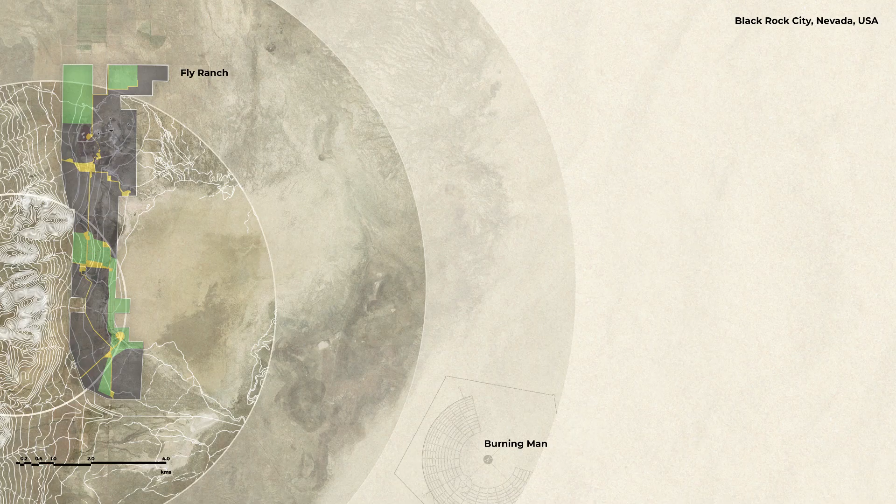The property has 640 acres of wetlands, dozens of natural spring water pools ranging in temperature from hot to cold, grasslands, and a small area of playa that opens onto the Hualapai Flat. The land's most prominent feature is the stunning Fly Geyser, a unique and iconic geothermal geyser that constantly releases water reaching 5 feet in the air and deposits minerals around it.

The Fly Ranch property is truly an oasis in the desert, and that is essentially the site. But how does it position itself around the Burning Man event?

At Burning Man, the community explores various forms of artistic self expression created to be enjoyed by all participants. Examples of creativity include experimental and interactive sculptures, buildings, performances, and art cars, among other media. These contributions are inspired by a theme chosen annually by the organizers.

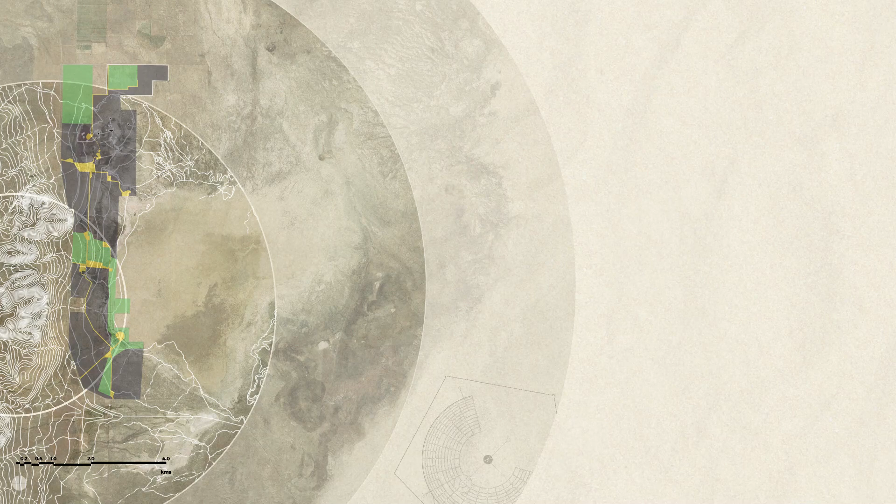As Burning Man embarks on a 2030 plan to make the annual event at Black Rock City sustainable, the Fly Ranch acquisition is a crucial step by the organizers to reinforce this effort, given the delicate yet beautiful ecosystem it contains. The competition is set to bring ideas to tackle the hard problem of net zero sustainable infrastructure with circular design thinking. These solutions can be based around systems of energy, water, food, shelter, and zero waste.

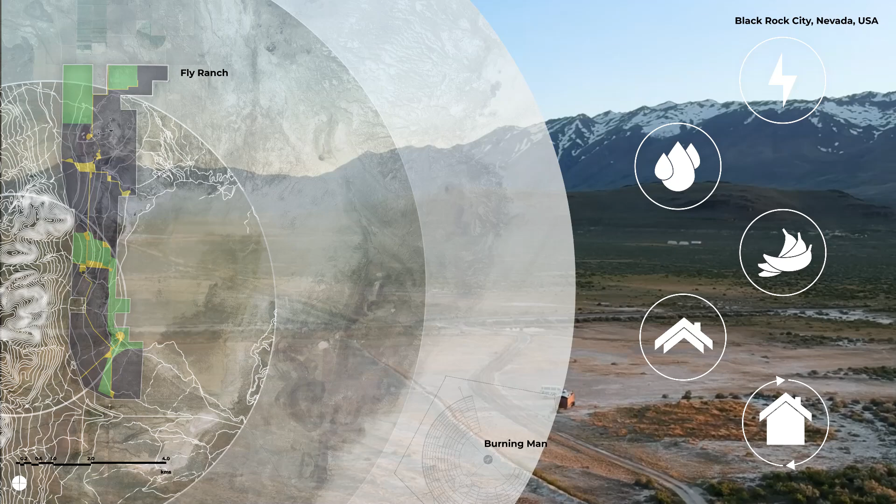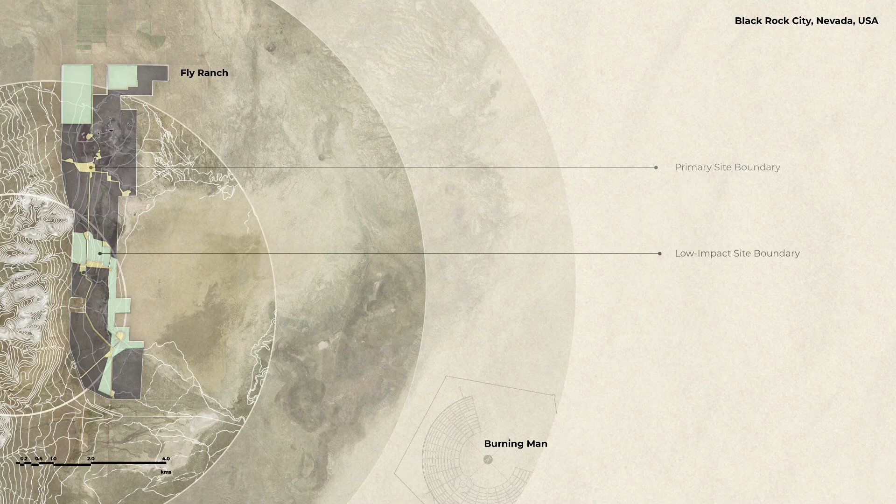The three distinct area types that define the site boundaries are the primary site boundary, where most of the design focus should be directed; the low impact site boundary, where a light footprint of proposals is allowed without deep foundations or excavations; and the conservation area, where no construction is allowed, dedicated to supporting the habitat of local flora and fauna.

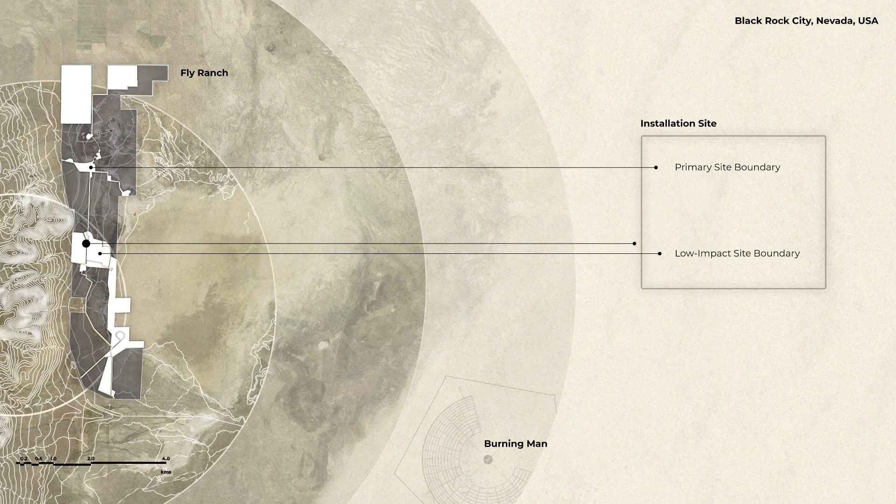The installation site is a combination of two boundaries, the primary and low impact. The reason for the central location of the site was the possibility of making the sculpture a beacon for visitors traveling across the massive property, like a lighthouse for navigation.

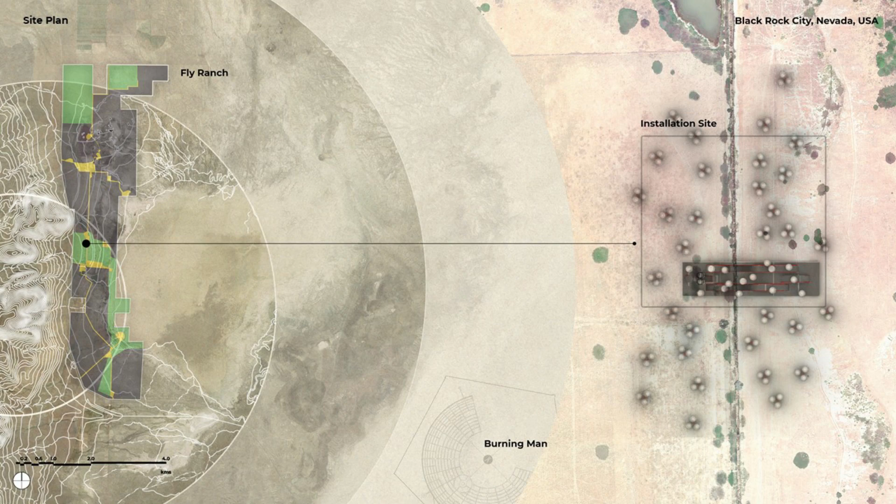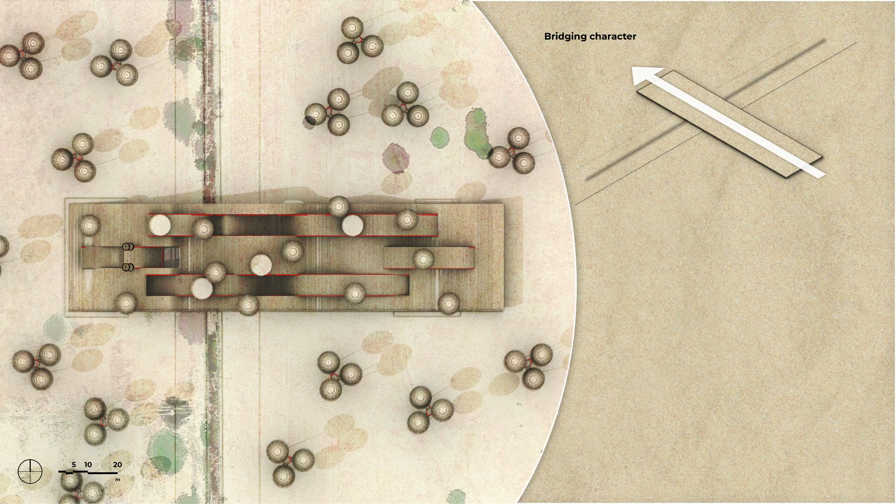The wayfinder idea is aided by a peculiar condition on site, a narrow stream of water that dissects the selected site almost in the middle and extends from north to south, thereby imparting some orientation. Though narrow, it certainly helps direct the design to have a bridging character.

This move also helps emphasize the importance of water as a transformative natural feature of the landscape. These subtle streams of lifelines are crucial to the delicate biodiversity of the Fly Ranch area and essential to conserve.

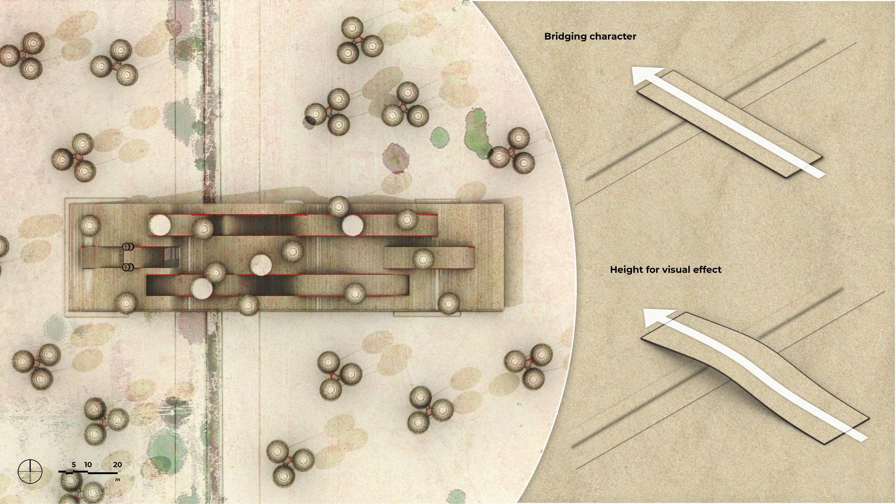As we sketch the form, we realize the potential of this sculpture to provide a sense of awareness to the fragile environment, especially if viewed from a certain height.

The design of the bridge-like platform takes inspiration from the movement of water. The ponds of water in and around the Fly Ranch area are strong visual clues as to how water can influence the ecosystem. We investigated this nature of movement of water, characterized by a sine wave oscillation.

In water's natural movement, the sine waves enlarge as they approach the shores or banks of a water body. Similarly, the platform becomes dramatic as one steps over it from either side, as if these were the very edge of water and land. The experience of the surface becomes smoother and continuous as one approaches the center, just as the experience in deep waters.

As part of a contributing infrastructure in the bare site, we wanted to establish a form that could not only draw attention for its aesthetic reasons, but also provide comfort for its users. The sine wave itself generates voids that could work extremely well for shelter, providing much needed shade for activities and leisure. Given the arid conditions of the site, it can prove to be a savior in disguise.

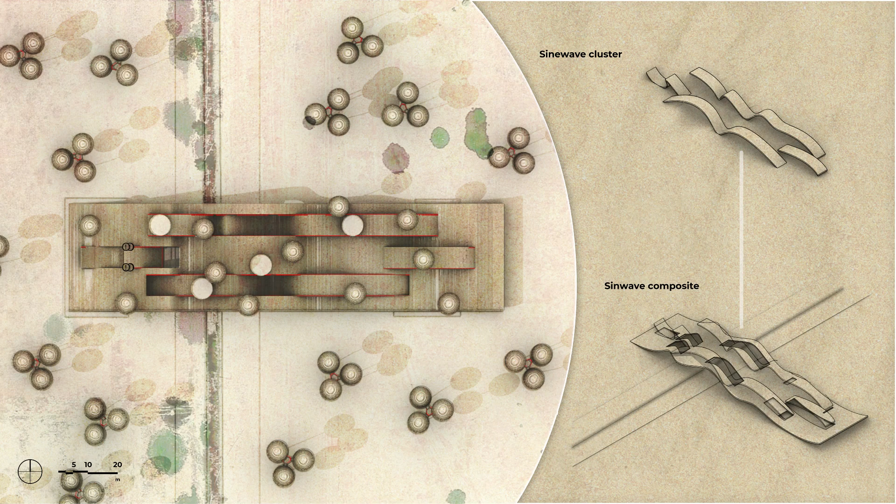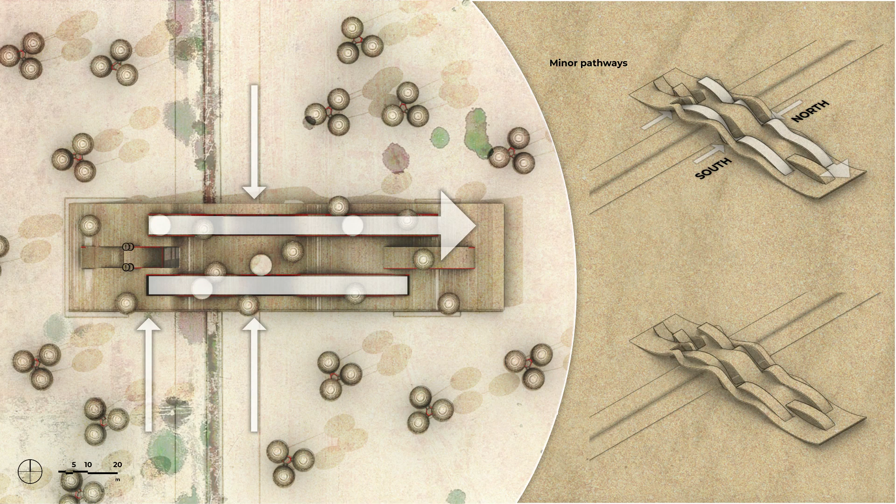The east-west orientation of the platform also aids the shading potential of the bridge-like sculpture. There is an attempt to make the access under and over the sculpture playful. The north approach gives a relatively narrow entry on the surface, while the south axis helps visitors go across the stream without disturbing it. The west side allows for a grand entrance onto the surface.

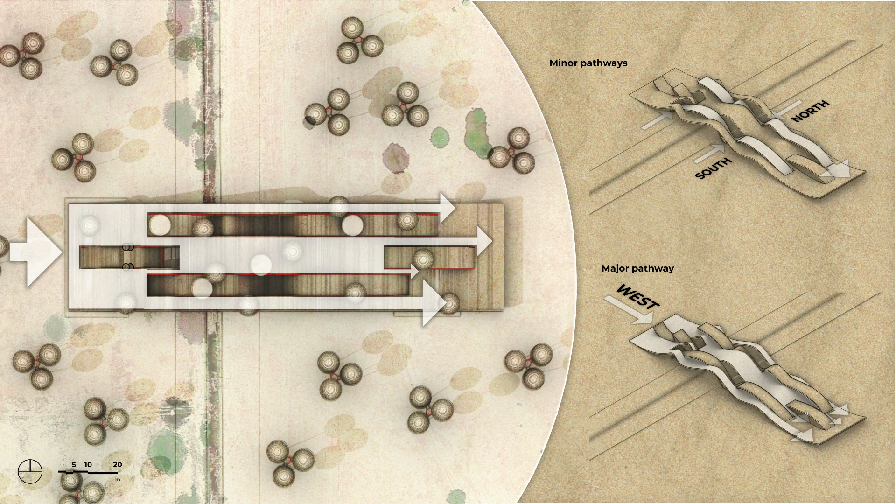One reason to keep a biased axis between the east and west sides of the sculpture is to keep activities under the eastern part less disturbed by the movement of people on the sculpture. Materiality is important to define the character of the curves. All the tectonics of the design were envisioned to be slender and sleek.

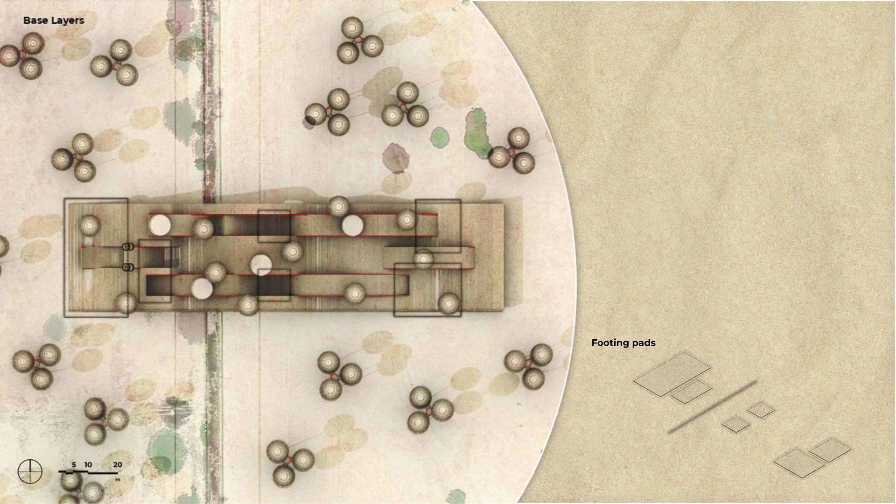The properties of the material should also aid in the easy assemblage of the sculpture on site. Starting with the base, the pads essentially lie in the low impact site boundaries. We have designed it to be flat and wide. These contact points on the surface avoid the need for deep foundations given the scale of the project.

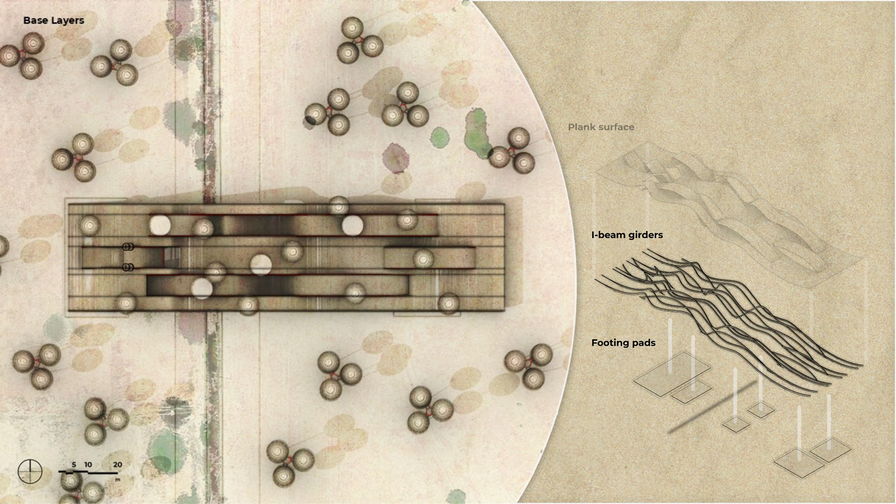The I-beam girders enable the curves to be drawn in the desired way. These also help in providing recesses which are used for electrical conduiting and lighting. Thick wooden planks are used to bridge the I-beam girders. The textural quality, workability, and thermal qualities of wood work well with the arid conditions of the Fly Ranch.

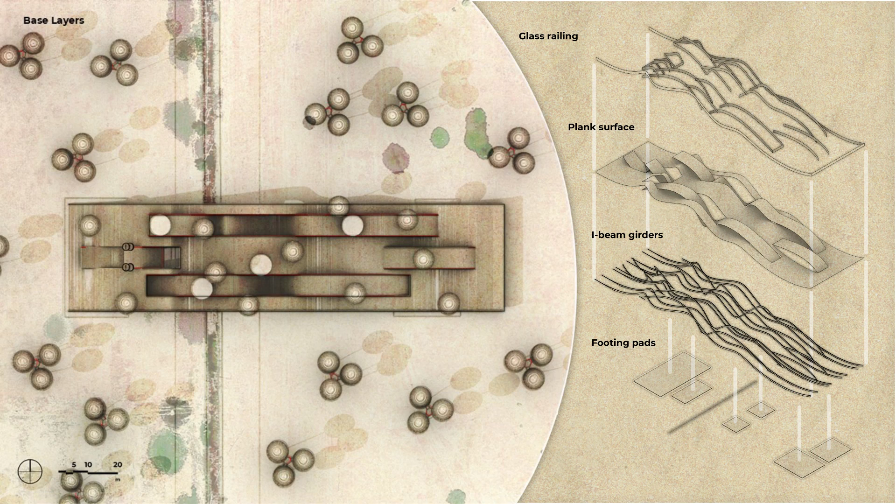These are spaced to accommodate thinner plank profiles which jut out from the surface to assist the moving up and down from the slopes. Besides safety, we intended the railings to be delicate in their aesthetics. Hence, we opted for tempered glass railing, which also incorporates photovoltaic membrane to support energy generation on site. The translucent nature of the railings, therefore, does not interfere with a minimal approach to the design.

Early in the project, we wanted to take inspiration from the ways lifeforms adapt in the fly ranch region and thrive in the scarcity and abundance of resources available to them. The buckwheat plant was an intriguing find in terms of harnessing energy and contributing to its environment as a host plant. The long, peculiar sprouting flower on top became the inspiration for the solar pods, which extend high up to tap the abundant sunlight to generate electricity, while the base becomes a shelter for the users of the installation.

The tech-savvy attendees of such events generally carry equipment such as cameras, drones, mobile phones, laptops, tablets, and all other related equipment that enable them to capture the beautiful surroundings and the eventful life that thrives in Burning Man. To support these needs, the sculpture relies on energy generated by solar means.

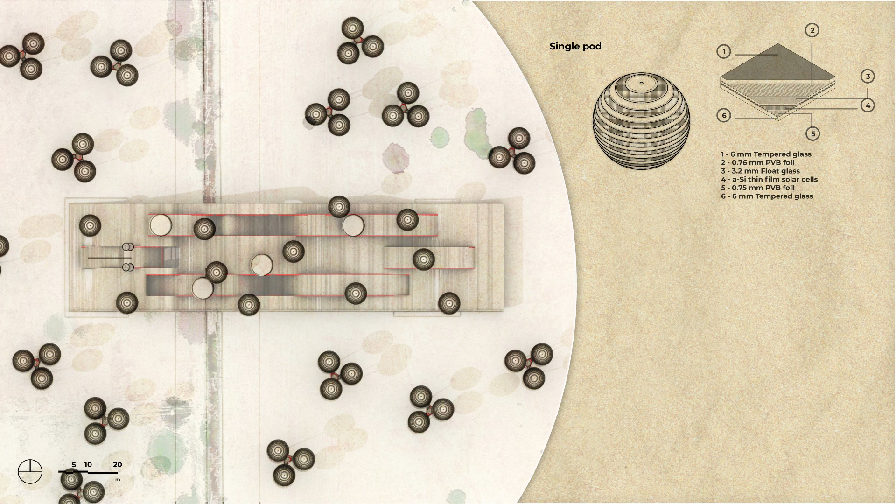The pods mimic the spherical shape of the buckwheat flower. The simple reason for the design decision is based on capturing maximum sunlight in all directions possible. The circular discs can harness sun energy even from low incidence sun rays, given the spacing which allows for light to pass through the consecutive discs.

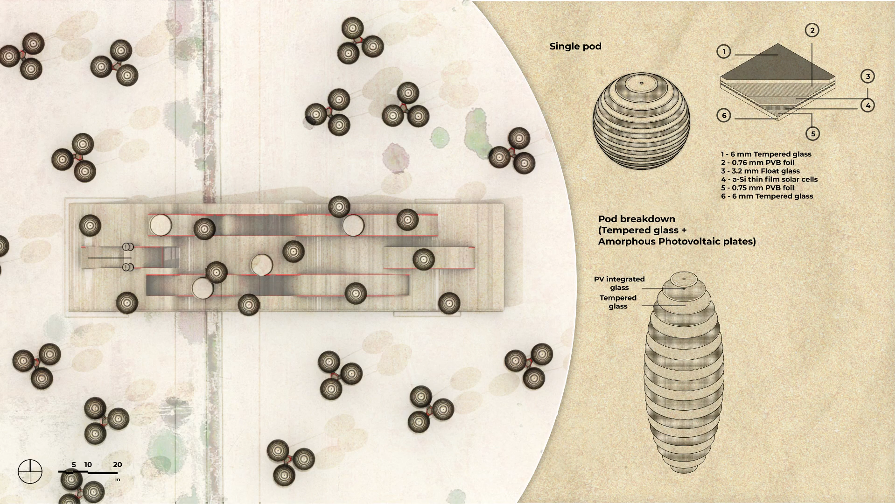These circular discs alternate between tempered glass and PV integrated glass. The PV integrated glass has a thin layer of amorphous photovoltaic membrane that generates electricity from the incident solar rays. These membranes vary in transparency and become opaque as we reach the bottommost section of the pod.

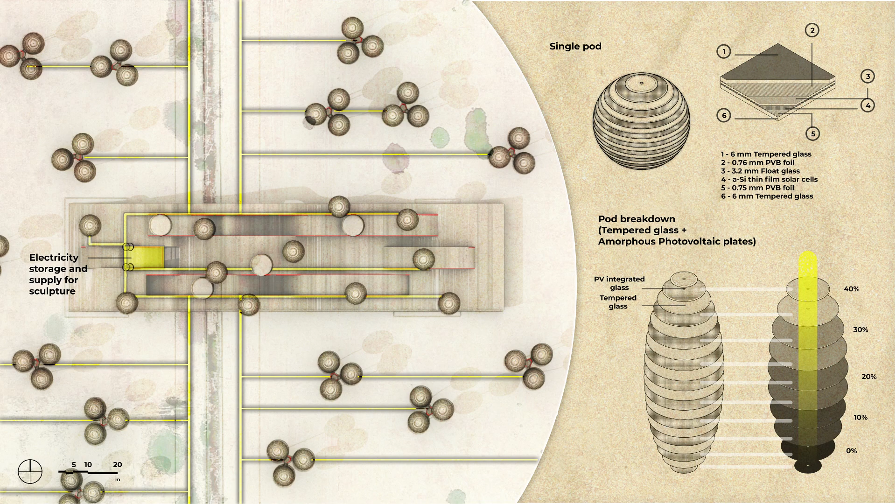The west side of the sculpture encloses a storage facility under its waveform, which is also supplied with electricity through the various pods spread across the site.

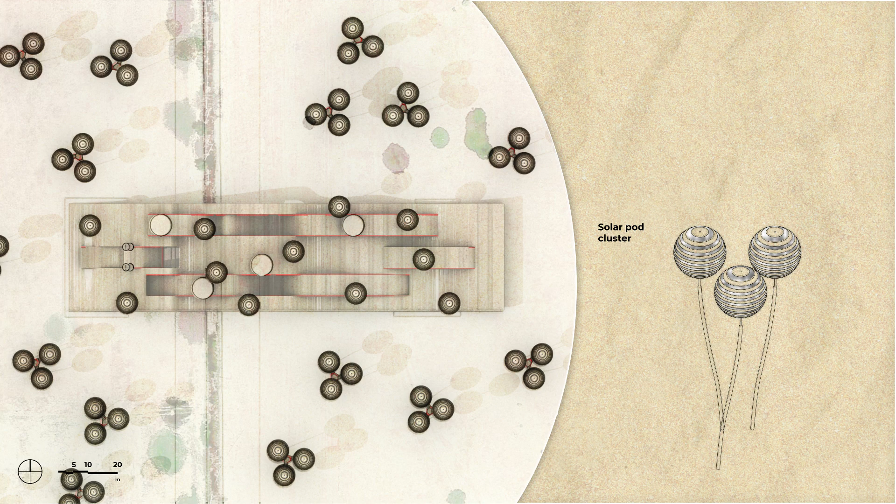As the visitors approach the site from a distance, we want them to get a sense of life and growth in the bare environment. The pods are arranged in groups of 3 around the wave. They further detach into single pods and eventually a single disc as one walks over the surface of the sculpture. The idea is to show progression and how water can impart growth in nature, from a seed to a forest.

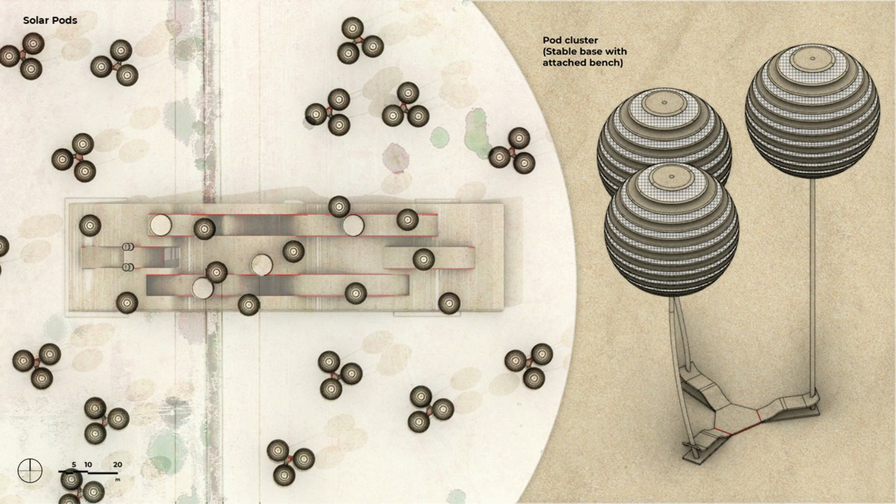The support of the pod cluster is made stable by connecting them together and also creating a bench-like feature which can provide for leisure and small gatherings. These benches are envisioned to be fitted with wireless charging capabilities that extend their functionality.

Extending the same idea of charging and leisure, the surface of the sculpture is integrated with planks that can support the load of the visitor movement and wireless charging capacity. The shorter edges of the plank are also fitted with socket points for plug-in devices. Short-range Wi-Fi is implemented throughout the sculpture dimensions, which enable the visitors to connect to the world.

The ample gentle slopes provide people with convenient access to either ends of the sculpture with possibility to lie down and gaze at the skies at times of low sun such as dusk or dawn.

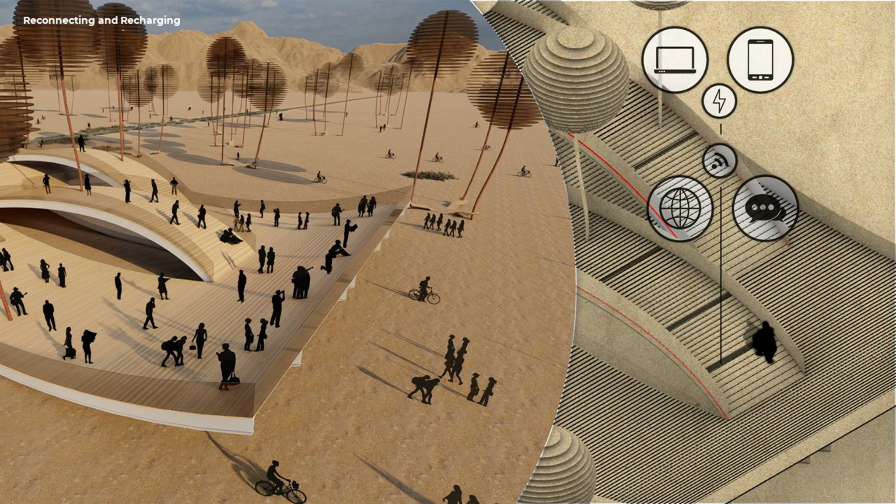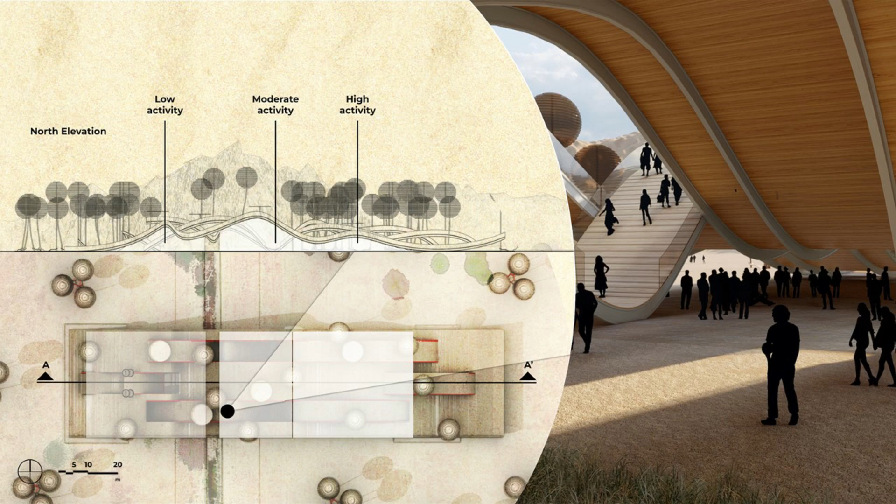The group seating around the sculpture allows for unique perspectives that visitors get to experience. The scattered arrangement of the clusters around the site provide areas for small gathering, while the grand shaded space under the sculpture can become a convening point for large crowds.

The stream which divides the landscape provides that notion of flowing water that is poetically represented in the sculpture. The installation creates interesting frames of the sculpture as one looks out into the Fly Ranch site. Here, people can also interact with the flowing stream under the comforting shade of the curvaceous form.

The major entrance shows the seamless connection between the sculpture and the land, as if it emerged out from the ground below. The luminescent pods light up in the night, creating an inviting ambience for the installation.

In the end, the beacon, which can be seen from a distance, reminds and reassures the visitors that there is a place that allows them to stay connected.